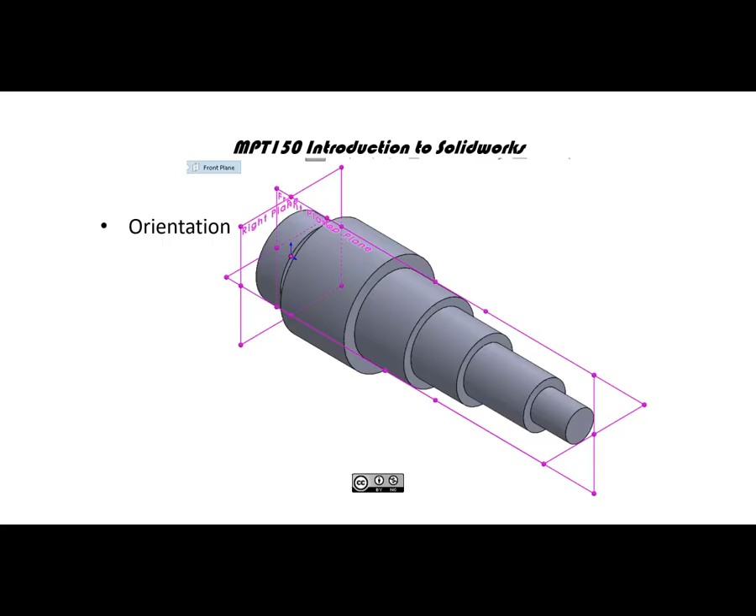All right, problem 6.6 is a stepped shaft. We can do all of this geometry in one revolve. We do need to take a look at the drill point here because it looks to me like a 90 degree. It doesn't look flat enough to be 118 degrees. So if we use the hole wizard, we're going to have to adjust for that. But since it isn't called out, we'll see how close we get to this number.

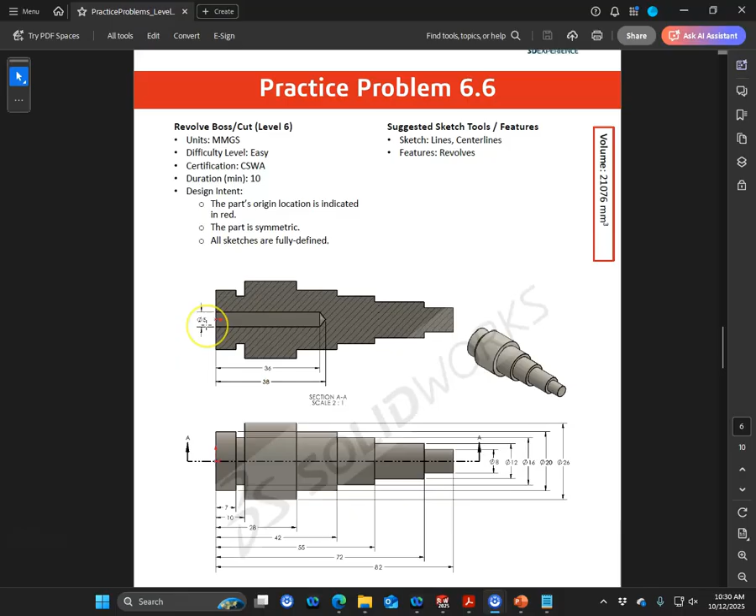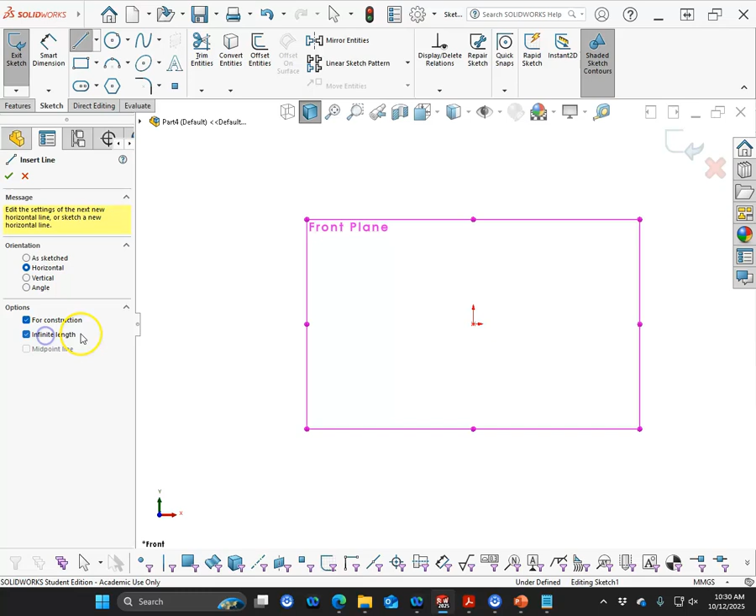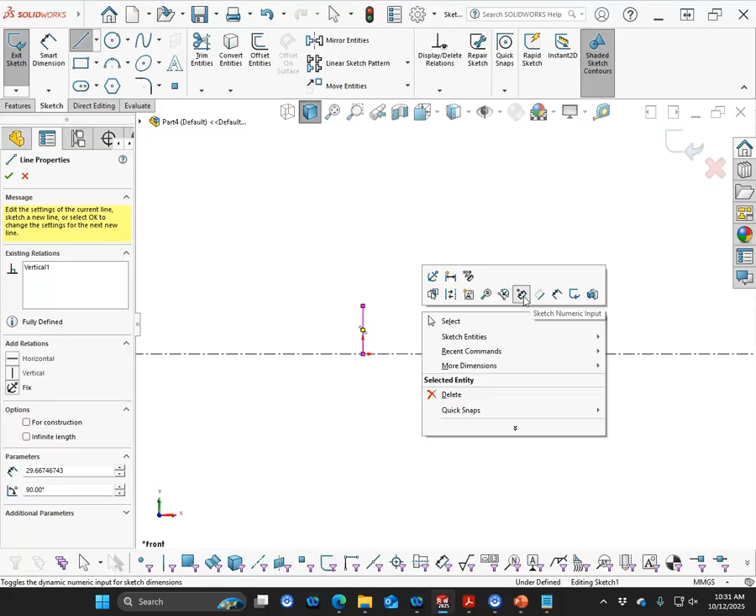So we're in millimeters. Part origin is at the left center, center lines, and revolves. And we can go ahead and get this one started. New part millimeter, front plane, based on the isometric. And we're going to go center line, horizontal, infinite length. The reason I like the infinite length is that I will not run out no matter how much geometry I lay over top of this. It won't get away. So I don't really want to do those with the sketch numeric input, so I'm going to toggle that off.

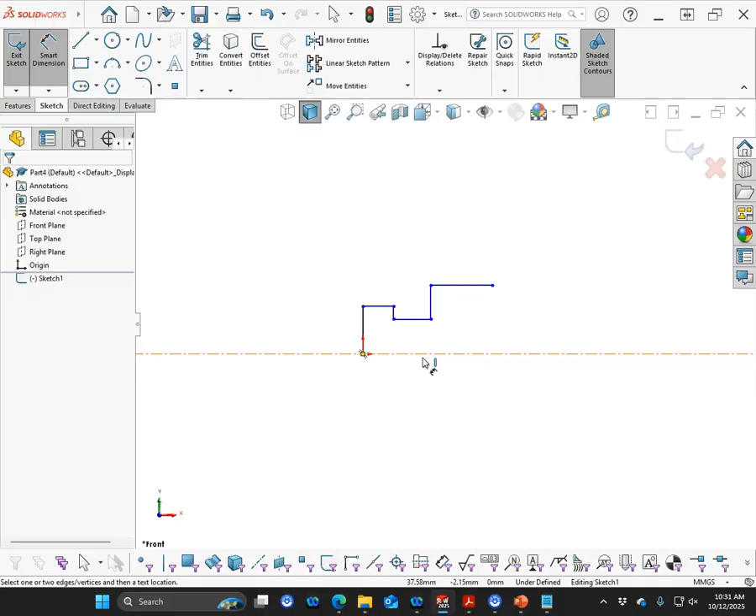And that first diameter, well, it goes to the outside. So I'm just going to rough in the shape because everything's coming off of the right side. We'll want to stop wherever it makes sense that we can work on this geometry. So 7, and then I want it to be in diametral since that's what we're given for the dimensions. We go 20 and 26. So everything else should be pretty good there. Need to follow that extension line for that one all the way over, and that one's going to be 16.

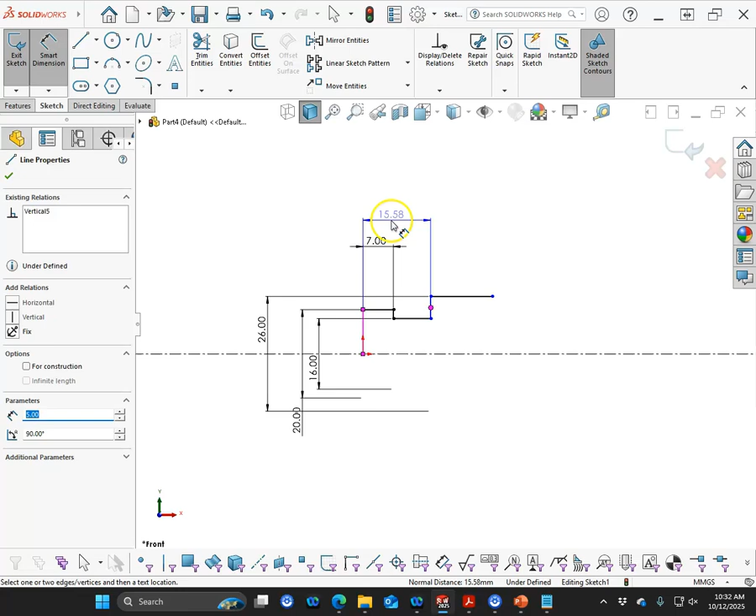And notice that the icon is still in the D for diametral dimensions, so I should just be able to pick that and place the dimensions. So 16, and then when I hit escape, I'm going to be able to shift back into the linear dimensions. And I got the midpoint, which isn't that big of a deal. It's just when I want it to select the midpoints, that's usually when it doesn't.

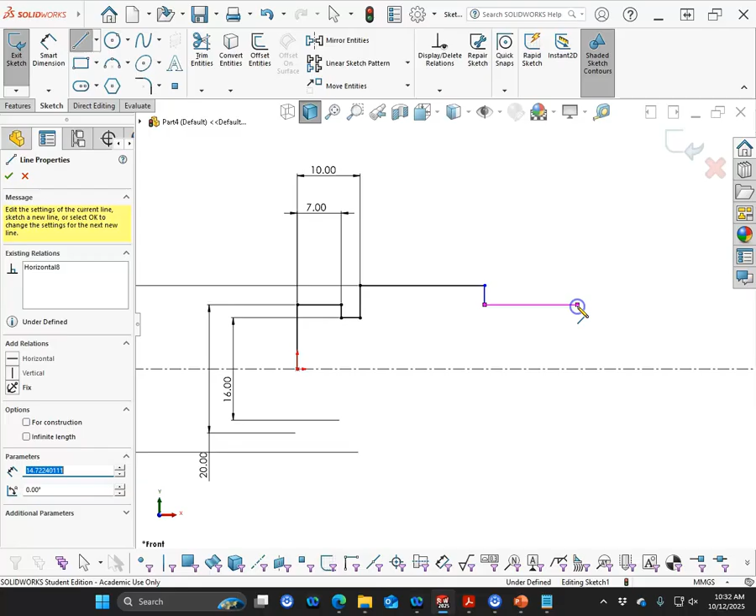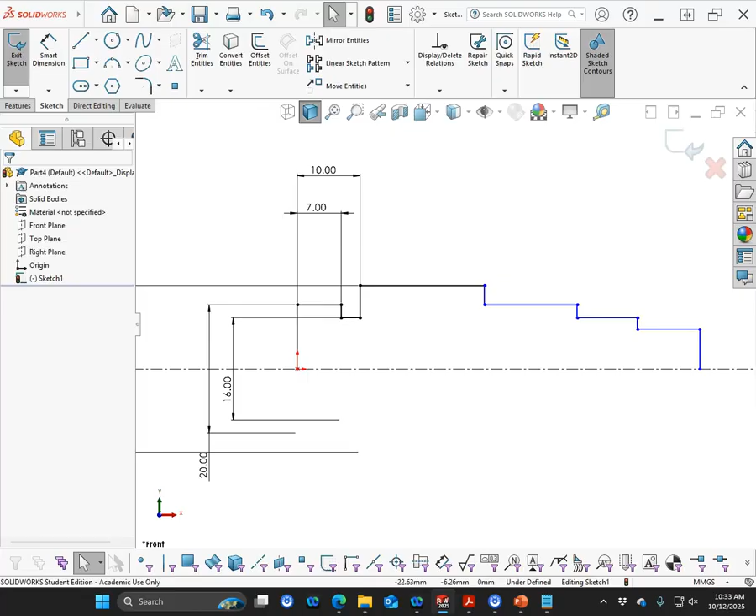So let's start working on the steps. We're going to have a first step, and we're also going to have to watch out. We do want horizontal. I just don't want any coincidences or, all right, so I slipped into click click, but I don't want any coincidences or collinears popping up. So let's see what I did. 1, 2, 3, 4, and 1, 2, 3, 4. Actually, there's another one in there, isn't there? All right, so let's add some dimensions so I can get this sorted out. So we'll drop in a few more horizontals.

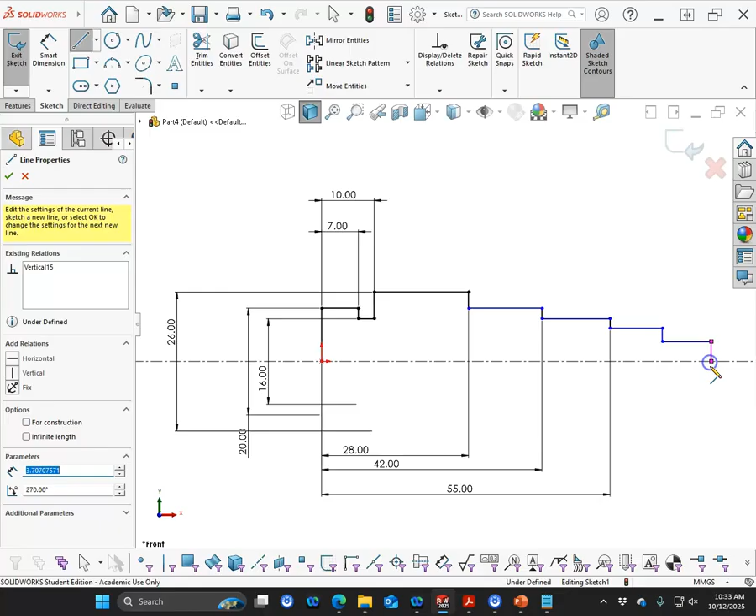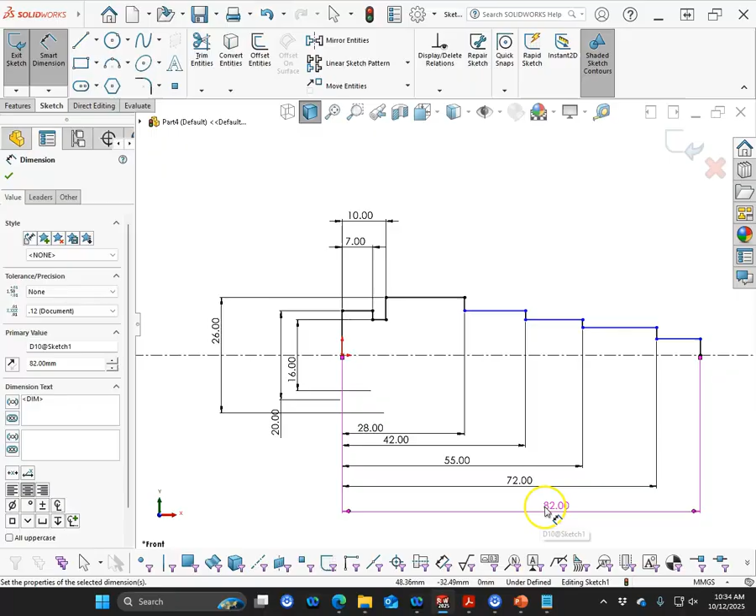So 28, and then we're going to go 42. Okay, so these are staying pretty close. Scroll up a little bit, 55, and then 72. So, yep, there was another one. And then we can come back to the center. Normally I would go ahead and close this off, but I do want to show you what is going on when it is not closed off and it asks you if you want to allow SolidWorks to close off that feature, so it can complete the revolve. It does need to be an enclosed region though.

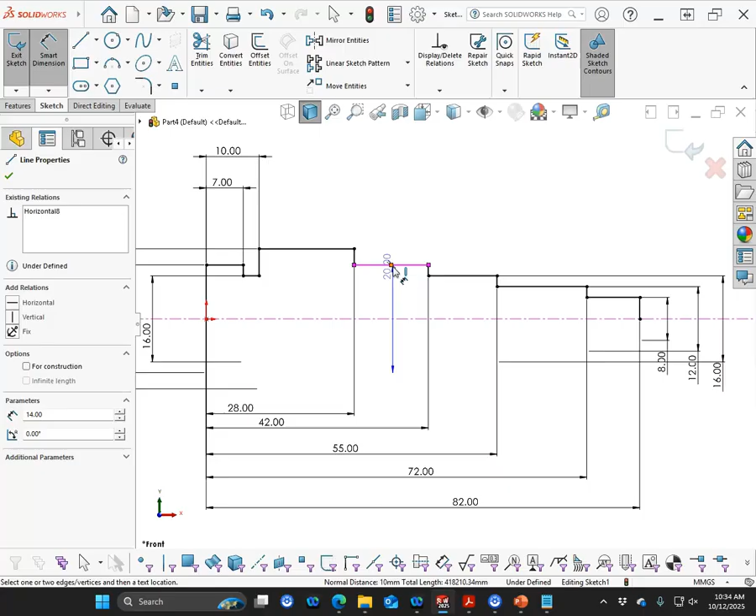So we're going to go 8, and then we'll go up to 12, and then we'll go to 16. Is there another 16? Yep, that was the same as coming all the way across, so 16. And then the outer next one up was also 20. So I could have made that one and that one collinear, but I think it's safer if I did mess something up or missed something, then I'd be able to correct just those items.

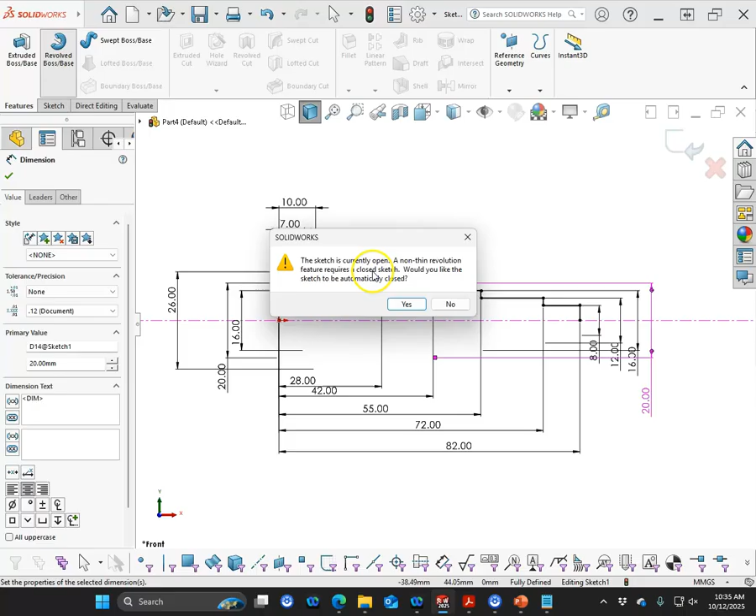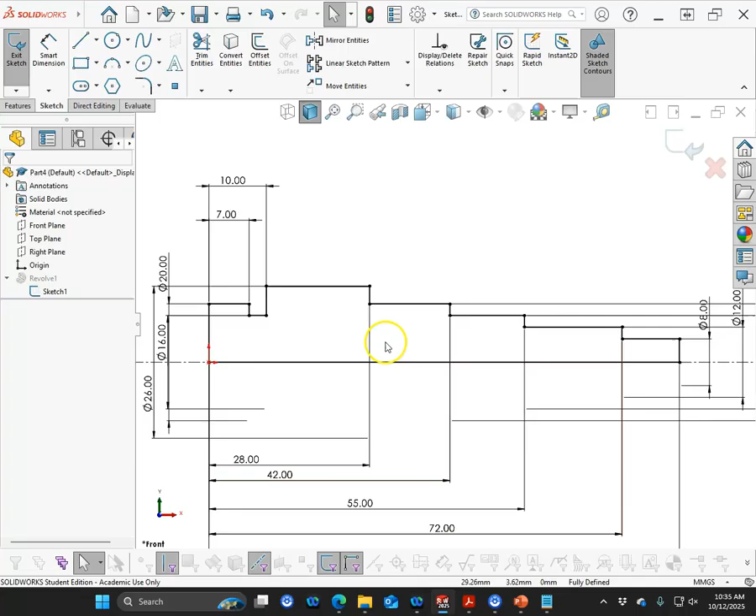All right, so revolve boss base. The sketch is currently open. A non-thin revolution feature requires a closed sketch. Would you like the sketch to be automatically closed? Yes. So it's going to draw me a line from endpoint to endpoint, go into the 360-degree revolve, and if I edit that sketch again, then I will have an object line. So if you think about it, go ahead and put the object line to close it off. The only time it really gets into trouble is where it generates self-intersecting, so maybe it tries to go from that corner and clips across the edge or does something weird with the revolve.

All right, so I'm going to go ahead and use the hole wizard, and that is upper middle, and we are in ANSI metric. We're going to choose a standard. Let's see, does it give me a tooltip? Just hole as its description. What it asked was I had previously changed numbers and made little adjustments, so it wanted to know if I wanted to retain those or kick them out. So I let it kick it out.

So 5 millimeters for the depth, and we're already showing the custom sizing. There's no adjustments. It is not through all. It is going to be a blind condition. And if we go to the tip versus the shoulder, this is where that 118 versus 90 comes in as a drill point. Standard drill point is 118 degrees.

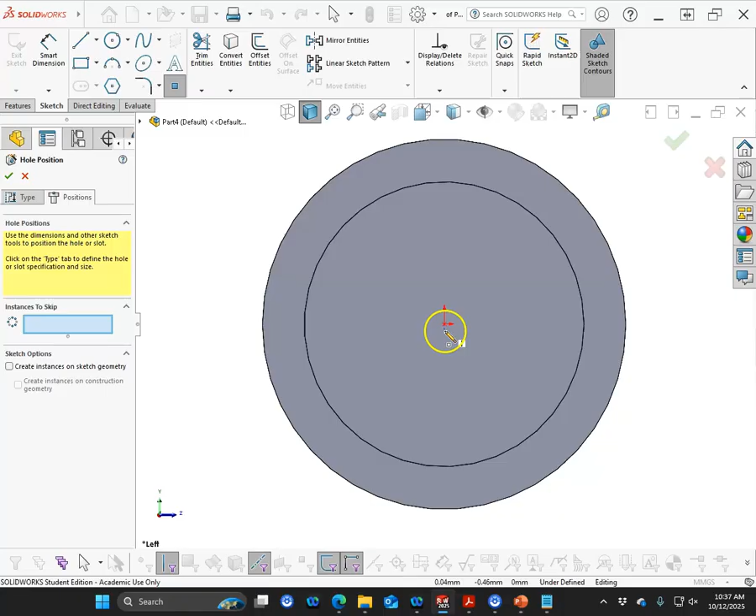There are different geometries. 135 is another common. 90, not so much, but there is tooling that is available to generate that. So if I go to the tip, let's go 38. I think that'll be easier to measure. So we'll go ahead and place a point on the origin, and because I'd already selected that face, it put the sketch directly on that face, and we'll go ahead and accept.

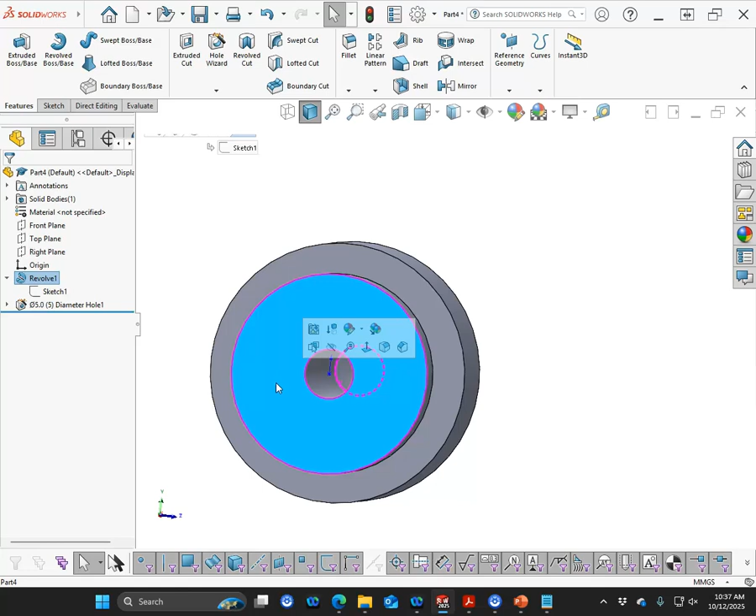So what I'm looking for is to be able to see that inside edge, and we're going to measure the shoulder to the outside face, and I'm not getting any numbers down here, so I'm going to go to the measure and make sure that I'm in millimeters, and we actually end up with 36.5 because of the 118. All right, so if I just drew that as part of the revolve, I could have put the angle in there, but it's not called out is kind of the issue that I'm having with it.

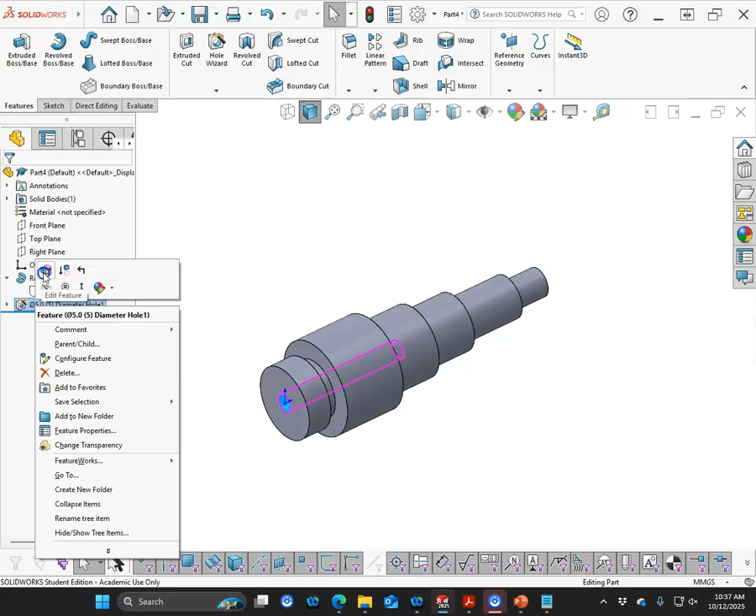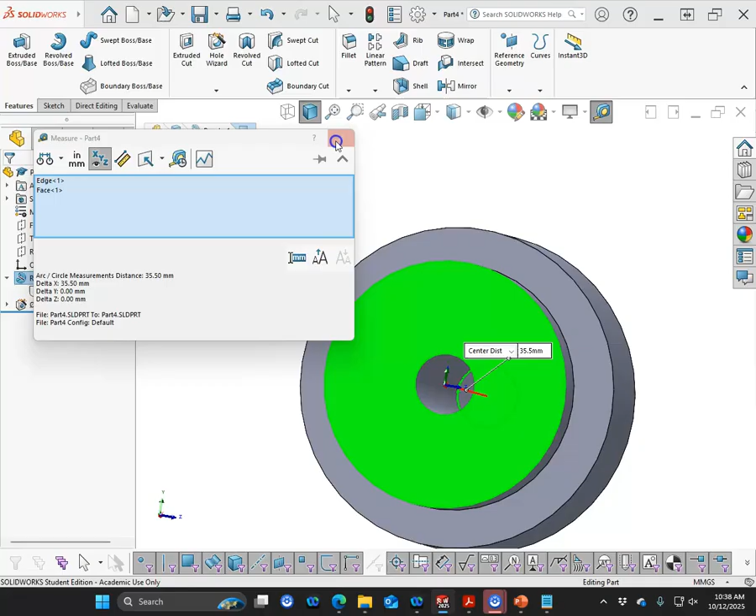So we'll go back in, show the custom sizing. I can override it to 90 degrees and see if that pulls it back. And we'll go into the measure. Now I have 35.5, so it's actually somewhere in between. So since I did not draw it into the geometry, I've created that little bit of a problem. It's an odd angle and not something that is really manufacturable. If it's not 90 and it's not 118, that creates a little bit of an issue.

So let's suppress that because it is a good bit of geometry for the explanation. Also, I would like my corrective geometry to be before it. So if you see the little fingertips over the rollback bar, you can move that before, and even though that's suppressed, it treats it as it's going to automatically insert it before that feature.

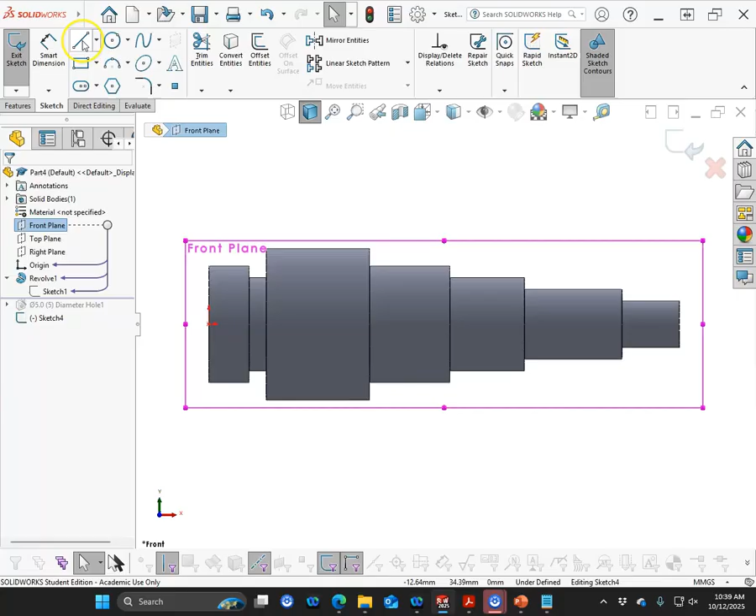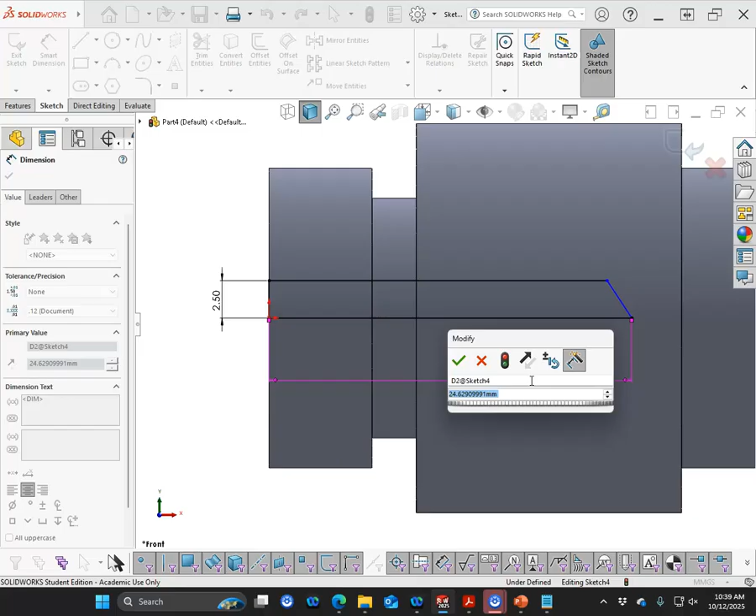So going back into the front plane, we will open up the sketch. Don't know that that needs to be a center line. So keep in mind that you don't have to have the center line, but it requires an additional selection. Also, I'm not going to get the diametral dimension, so 2.5. And the bottom line is going to be the 38 to the tip, and the top line is going to be the 36.

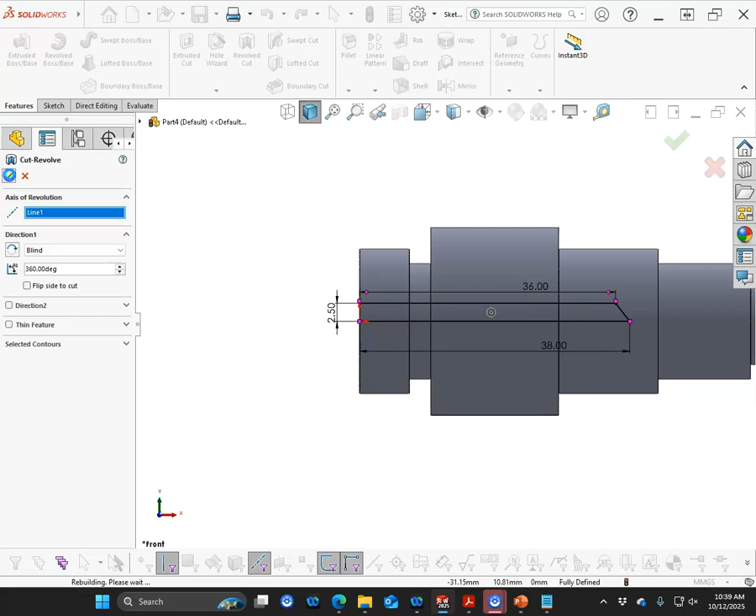All right, so when we go into the features and go to our revolved cut, the axis of revolution is going to be that object line that we generated, and I'll cut 360 degrees. And then we can roll back and see what the difference in the geometry is. All right, so our number is 21076. So evaluate mass properties, 21076.

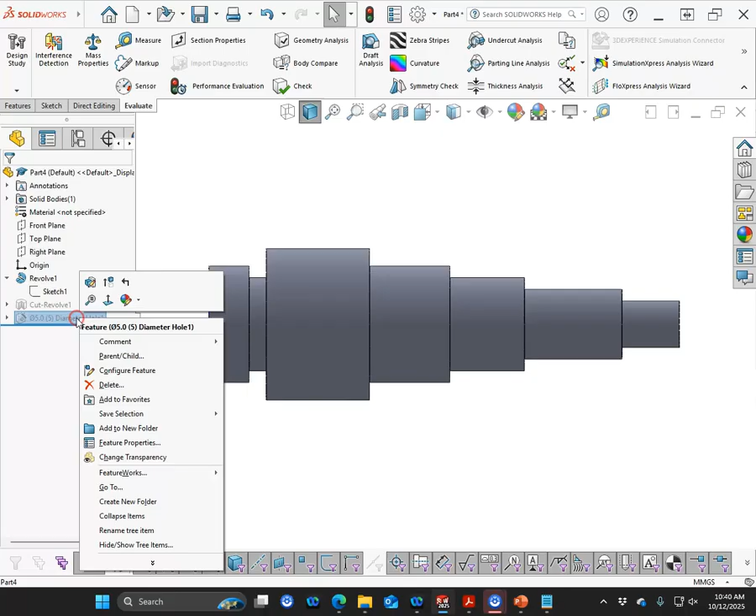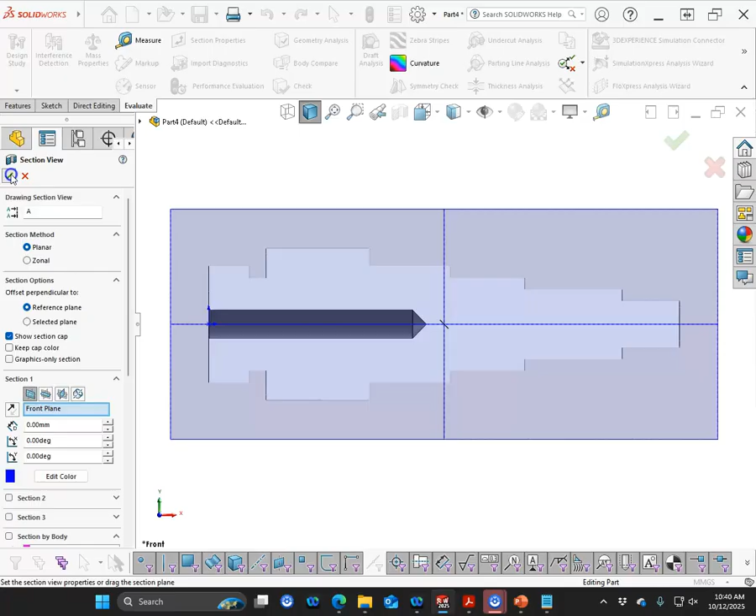So I would like to do the what-if scenario. Let's go ahead and suppress the cut revolve, unsuppress the 5mm, and go into the mass properties. And now we're at 21082. So just a little bit of difference, but enough that it puts us off on the geometry. So I'm going to go into the section view and take a look. So that was 90 degrees. The 118 was even a little bit flatter.

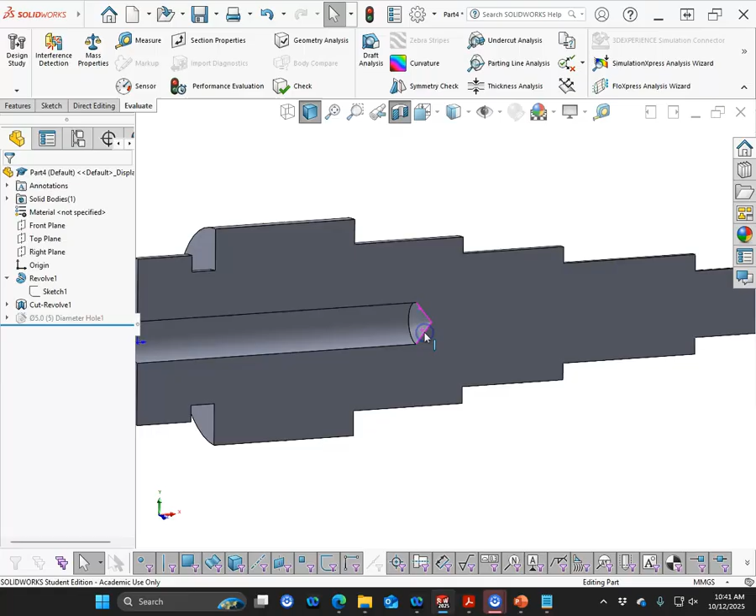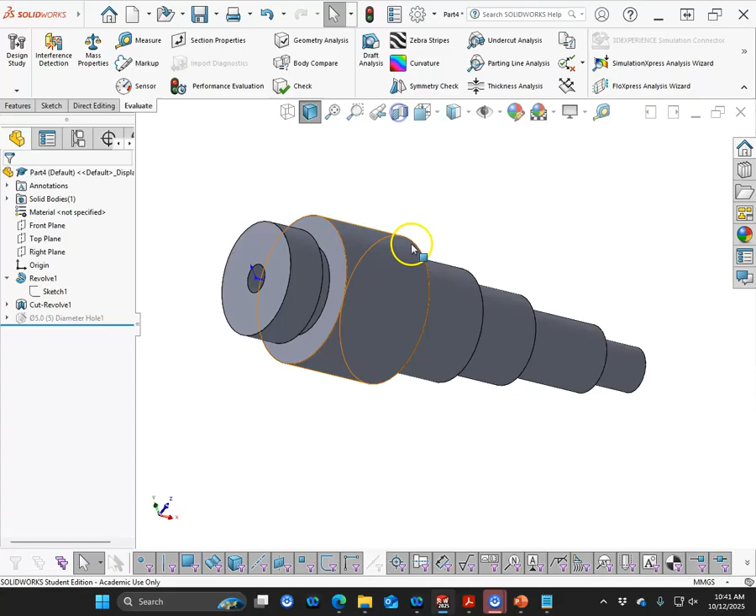So if I reverse that process, unsuppress, suppress the 5mm, it didn't create any major issues. But let's see if we can measure. Those aren't really edges, so I don't know if it'll let me. 102.68. So if you really want that to be 102.68 and you send this part to my machine shop and say that has to be whatever, then I'm going to charge you for grinding a custom tool to drill that hole and hold that tolerance. So choose wisely.